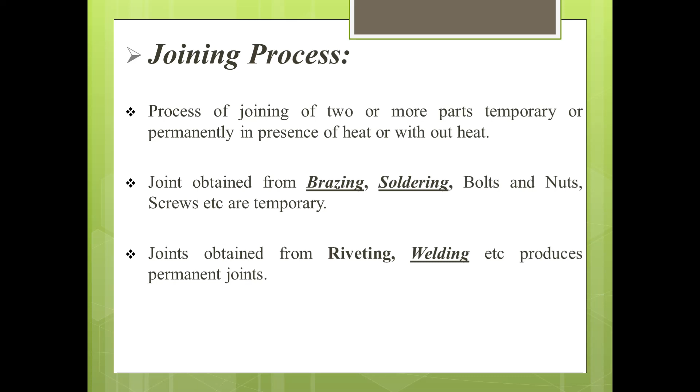And joints done through rivets and welding, we call permanent joints. Welding is also a joining process. And riveting - you might have seen rivets, which have a head - riveting and welding are permanent joints.

Next we are going to discuss welding. Welding is the process of joining two similar or dissimilar metal pieces by heating them to a suitable temperature and then fusing them together, either with or without the application of pressure. That is welding.

Welding is a joining process where we join two similar metals or two dissimilar metals by the application of heat, increasing the temperature to a certain level, and then fusing them together by the application of pressure, or without pressure. That is the process of welding.

A slight gap exists between the workpieces which can be filled by a filler metal, but welding can be carried out without the use of filler metal. Whenever you want to join two metals or dissimilar metals, there will be a slight gap between the workpieces, which can be filled by filler metal - extra metal used in the welding process. But welding can also be carried out without filler metal. Sometimes we use filler material to fill the gap, and sometimes we don't. That is the welding process.

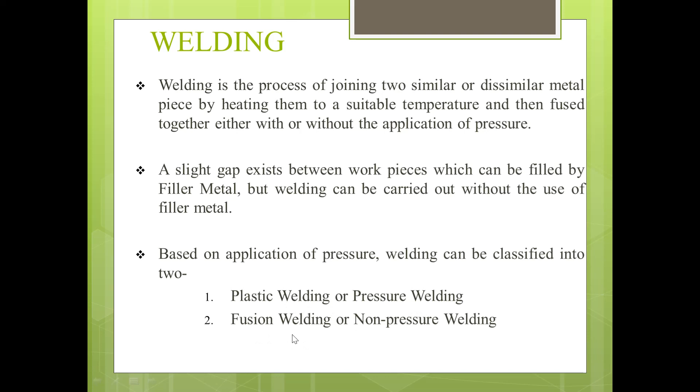Based on the application of pressure, welding can be classified into two types. The first is plastic welding or pressure welding, and the second is fusion welding or non-pressure welding. So we need a clear classification of the types of welding.

There are two types of welding: fusion welding and pressure welding. In fusion welding, we have homogeneous welding and heterogeneous welding processes. In homogeneous welding, we include gas welding and electric arc welding. In heterogeneous welding, we include brazing and soldering.

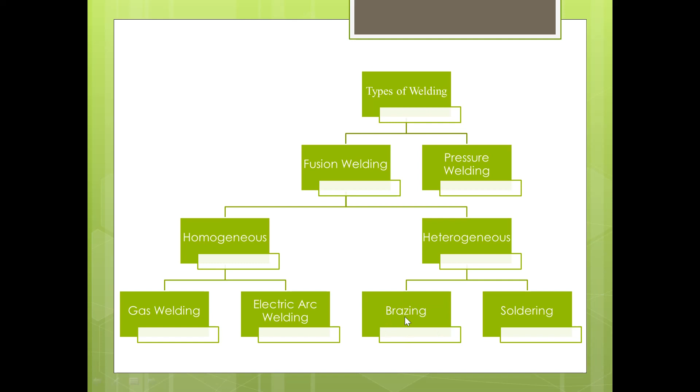We are going to call it heterogeneous welding. Next comes the plastic welding or pressure welding. The metal parts to be joined are heated to the plastic state or above and then fused together by applying external pressure. That is nothing but plastic welding.

Plastic welding means the metal parts to be joined are heated to the plastic state till it reaches the plastic temperature of welding. We heat it and then fuse it together by applying external pressure. Here no filler material is used in plastic welding.

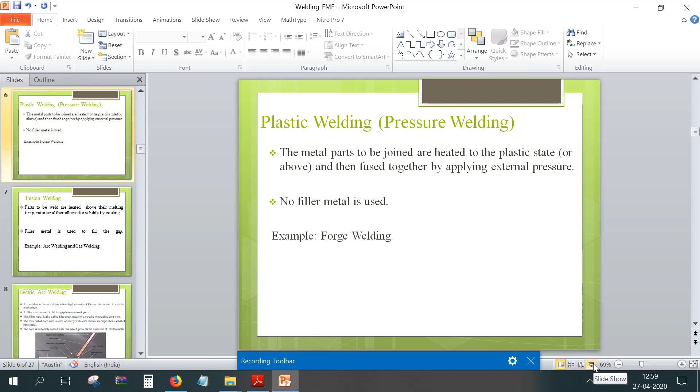An example is forge welding. Forge welding is an example for plastic welding. We are going to call forge welding the plastic welding example.

Next comes fusion welding. Fusion welding is another type of welding process in which parts to be welded are heated above their melting temperature and then allowed to solidify by cooling. Here the parts to be joined are heated above their melting temperature. All metals have certain melting temperatures, so we heat above the melting temperature and then allow it to solidify by the cooling technique. That is nothing but fusion welding.

First we heat it to an elevated temperature up to its melting point, and then we hold it together till it solidifies by cooling.

A simple example: joining two pieces of paper. First you apply gum to the two ends of the paper, and then press it together. We hold it till the gum solidifies. That is a simple way to understand fusion welding.

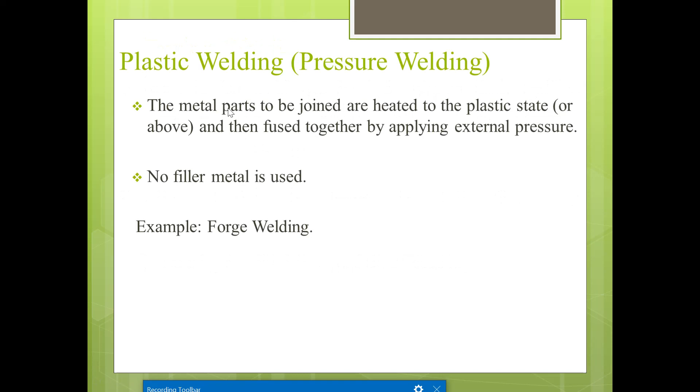Here also we take the parts, heat them above their melting temperature, and allow them to solidify by cooling. Filler metal is used to fill the gap. In fusion welding we use filler metal, and examples are arc welding and gas welding. But keep in mind, plastic welding does not use any filler metal, while fusion welding does use filler metal to fill the gap.

Arc welding is a fusion welding process where a high intensity electric arc is used to melt the workpiece. We induce a high intensity electric arc from the electrical supply, and the surface of the workpiece is melted by the electric arc.

A filler metal is used to fill the gap between the workpieces. This filler metal is also called the electrode. We call this electrode itself the filler material in electric arc welding, and it is made of a metallic wire called the core wire.

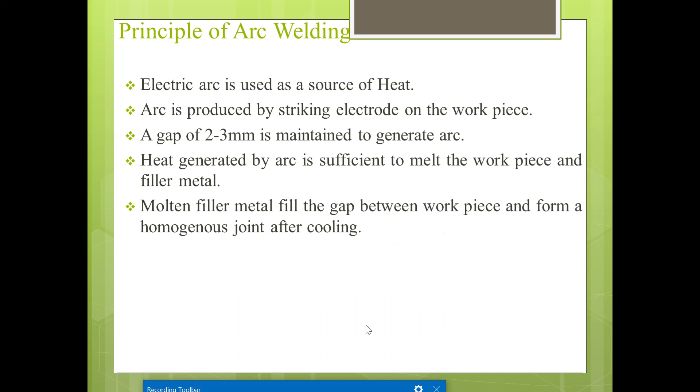The temperature of the arc ranges from 5000 to 6000 degrees Celsius. The electrical energy produced in this arc pool or welding atmosphere has this temperature, and this high heat melts the base metal and the tip of the filler metal.

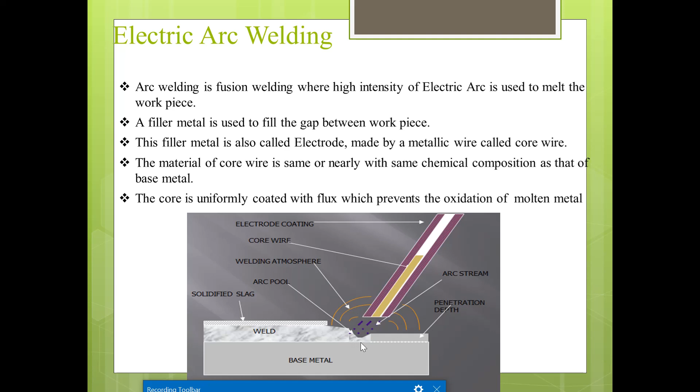The molten filler metal is transformed and transferred to the molten base metal, forming globules. Whenever a temperature of 5000 to 6000 degrees Celsius is induced, the electrode melts, and the surface of the weld base metal also melts.

Molten filler metal is transferred to the molten base metal in the form of globules, and the deposited metal fills the joint, forming a single piece of metal. Whatever metal is deposited forms a joint, resulting in a single piece of metal.

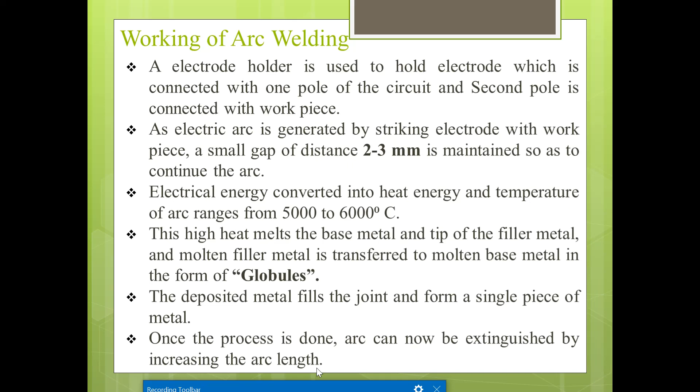Once the process is done, the arc can be extinguished by increasing the arc length. Once the process is finished, we extinguish the arc by increasing its length. This is the working of arc welding, as shown in the same figure discussed here.

Welding uses AC or DC current; we can use alternating current. AC means nothing but alternating current, and we can also use direct current. So the circuit consists of a step-down transformer.

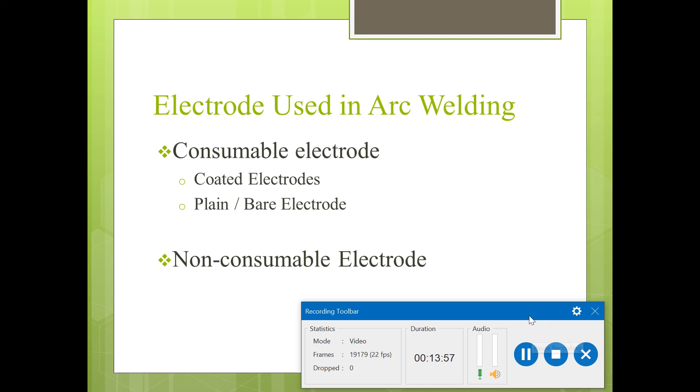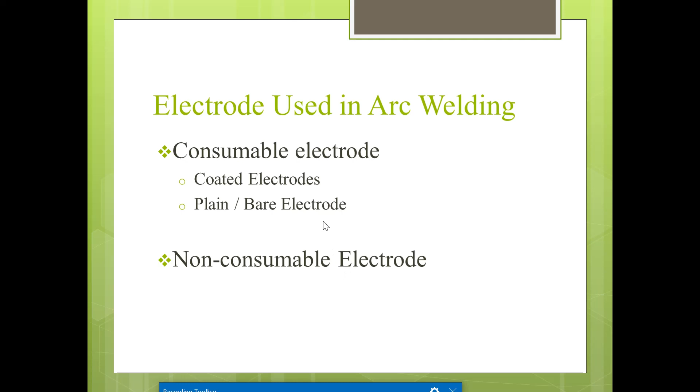Electrodes used in arc welding - we use different types of electrodes in arc welding. These are classified as consumable electrodes and non-consumable electrodes. Consumable electrodes are coated electrodes or plain, bare electrodes. Non-consumable electrodes are ones we do not consume during the process.

Welding fluxes - different types include SiO2 (silicon oxide), titanium oxide, magnesium oxide, and aluminum oxide, used as typical welding fluxes. These produce a gaseous shield to prevent oxidation of the molten metal, and chemically react with the oxides to form a slag.

The flux reacts chemically with the oxides and forms a slag. The slag floats and covers the top portion of the molten metal and stabilizes the arc, as seen in electric arc welding.

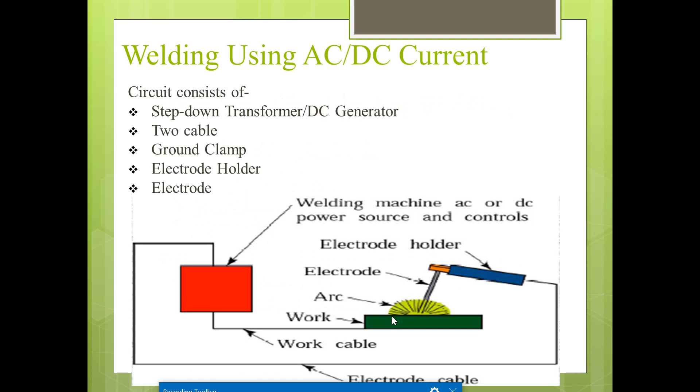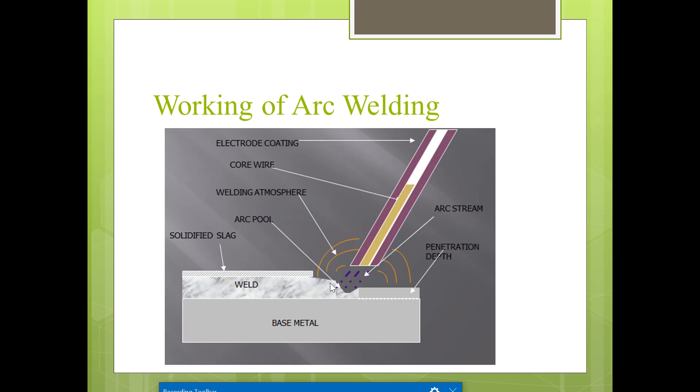I'll show you the slag layer - this is called the solidified slag layer which covers the molten metal. It prevents this molten metal from the oxidation process. That's what the weld fluxes do: the slag floats and covers the top portion of the molten metal and stabilizes the arc.

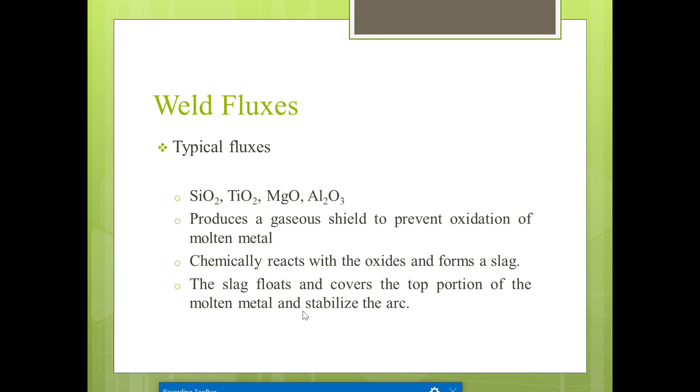Next is gas welding. Gas welding is a fusion type of welding process, classified under fusion welding. The heat for melting the base metal is produced by the combustion of gases. We use different gases to produce fire or heat, then use that heat to melt the base metal, and after melting we weld it. This is the gas welding process.

Gases are mixed in proper proportion to generate the required heat for melting. Combustion of gases takes place inside a pipe called the welding torch - similar to how electric arc welding uses an electrode holder, gas welding uses a welding torch. Within the torch, a proper amount of gas comes in and is mixed, and the burning takes place within the pipe.

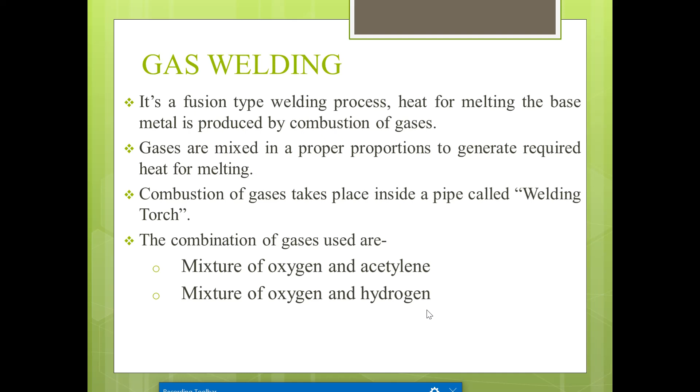The combination of gases used for gas welding is a mixture of oxygen and acetylene - called oxyacetylene welding - or a mixture of oxygen and hydrogen can also be used. The first is the oxyacetylene process. The arrangement for oxyacetylene welding consists of two large cylinders: one for oxygen and one for acetylene, with a pressure regulator to regulate the pressure of both oxygen and acetylene.

A welding torch is an element where we mix the perfect proportion of oxygen and acetylene. The operation is very simple. We take one oxygen cylinder and one acetylene cylinder, both connected with their respective regulators to send equal amounts of oxygen and acetylene to the welding torch. There, oxygen and acetylene mix equally, and combustion of the gases produces the flame. The temperature of the flame ranges up to 3200 degrees Celsius, which is sufficient to melt the workpiece.

The oxygen gas comes through this pipe and the acetylene gas comes through this pipe, both connected to the welding torch. Here we mix the oxygen and acetylene and produce a flame, having a temperature of 3200 degrees Celsius, sufficient to melt the base metal. This is the base metal - one metal and another metal - which we are going to join using this temperature produced by the welding torch.

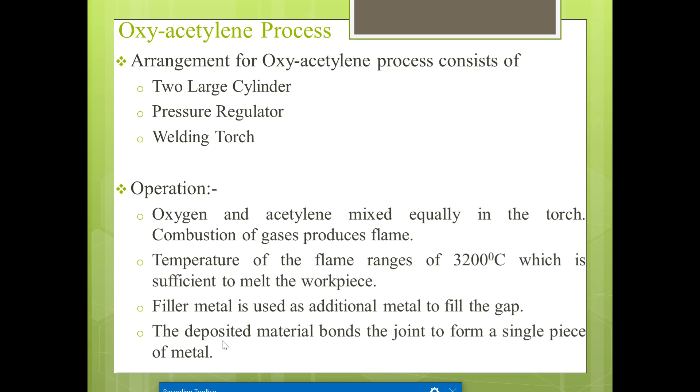Filler material is used as additional metal to fill the gap. Here we use the filler rod - an extra filler rod. The heat coming from the welding torch melts the base metal, and this filler rod fills the gap, creating the perfect joint. So this is a simple explanation of the oxyacetylene process.

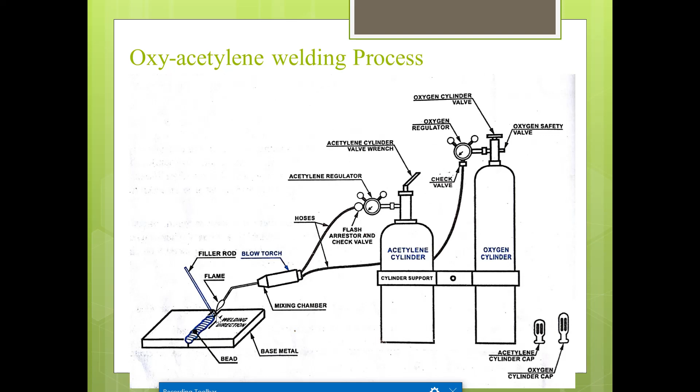One cylinder holds acetylene, another holds oxygen. Equal proportions of oxygen and acetylene are brought to the blowtorch or welding torch, where they mix and produce a flame with a temperature of 3200 degrees Celsius, melting the base metal. The base metal is then joined using a filler rod, which fills the gap between the two base metals. This is the oxyacetylene welding process.

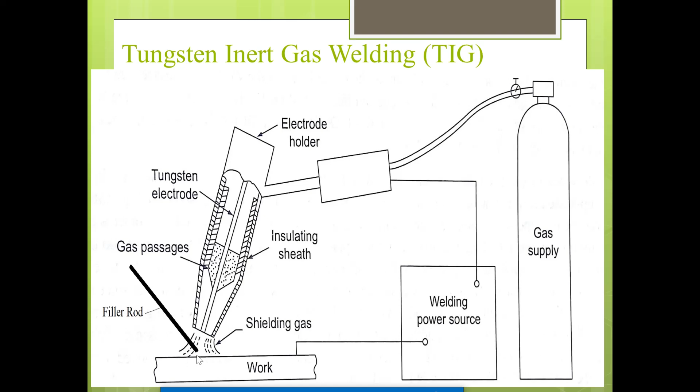In the tungsten electrode, the gas is going to burn the tungsten electrode. It is going to create a high temperature here, and that gas flame we are going to pass to the base metal. The base metal will be melted, and again the filler rod is going to fill the gap.

This is nothing but tungsten inert gas welding. We have another type of gas welding, that is nothing but metal inert gas welding.

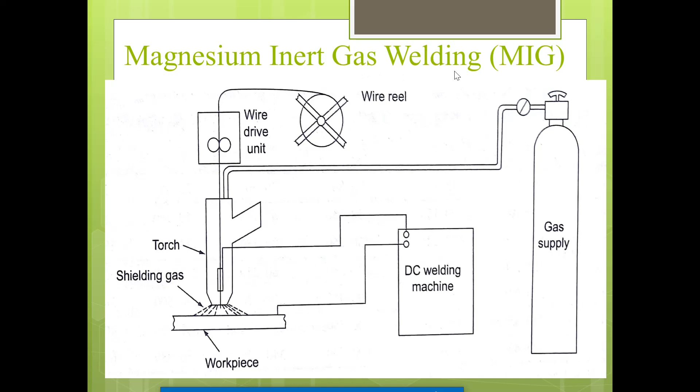So this is nothing but the metal inert gas welding technique.

These are very simple techniques, and a question on metal inert gas welding or tungsten inert gas welding will likely be asked in the exam.

The next one is types of flames produced in gas welding. There are different types of flames produced in a gas welding process. Based on the mixture ratio of oxygen and acetylene, the flame can be divided into three types in oxyacetylene welding.

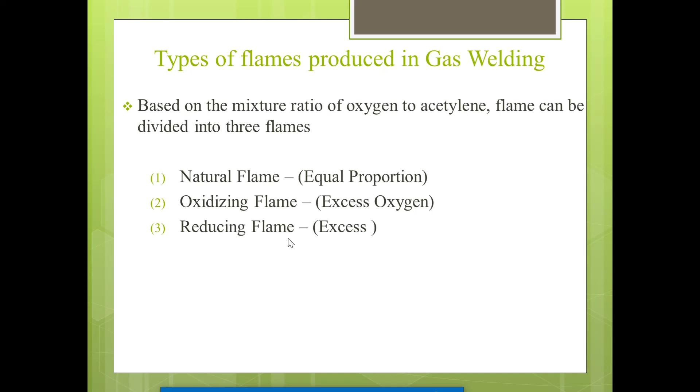First is the natural (neutral) flame, where we have an equal proportion of oxygen and acetylene. The oxidizing flame has an excess amount of oxygen. In the reducing flame, excess acetylene is present. So we can differentiate three types of flames here: neutral flame, oxidizing flame, and reducing flame.

So these are the three different types of flames we observe in the oxyacetylene welding process.

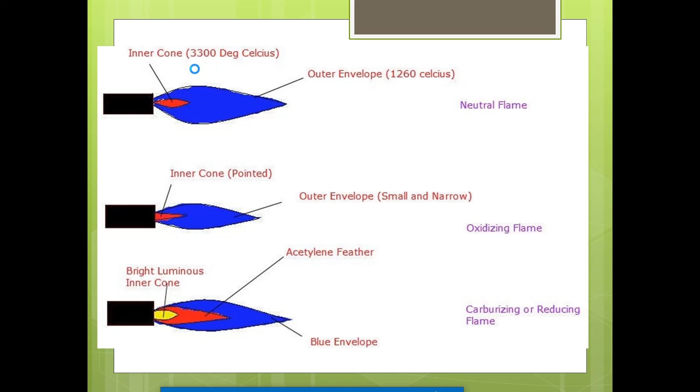You can look at the temperature here: 3300 degrees Celsius for the inner cone, and 1260 degrees Celsius for the blue envelope.

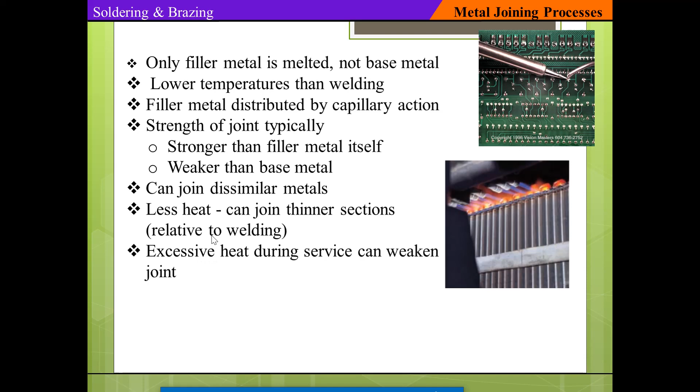Sometimes it may have a tendency to form weak joints in soldering and brazing. Solder, we call it equal to a filler metal, and alloys of tin are used here, such as silver, bismuth and lead.

The melting point of soldering is typically below 450 degrees Celsius. Flux is used here to clean the joint and prevent the oxidation process.

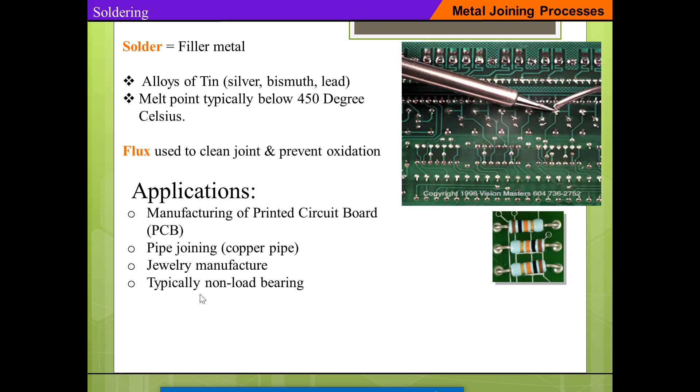The various applications of soldering are manufacturing of printed circuit boards (PCBs), pipe joining such as copper pipes, and jewelry manufacturing, joining ornaments. Typically it is used for non-load bearing applications, where there is no load.

Next is manual PCB soldering. How is PCB soldering done? This is a soldering process using a soldering iron and solder wire, called PTH, pin through hole connectors. Soldering iron and solder wire can be observed here, using a solder gun and solder wire.

Heating the lead and placing the solder: we heat the lead, that is the filler material, with the solder gun, place the solder over the circuit, and heat it for 2 to 3 seconds.

We heat the solder gun for 2 to 3 seconds and place the wire, bringing the lead wire near the electrode gun and melting it. Then we trim off any excess lead present over the circuits. This is the pin through hole connector, the manual PCB soldering process, explained with simple images.

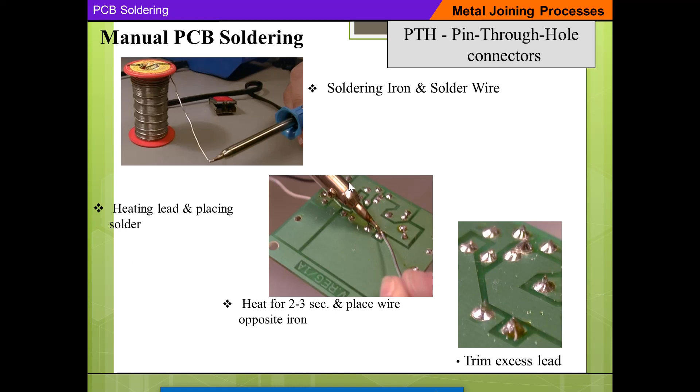Brazing technique is the use of a low melting point filler metal to fill a thin gap between mating surfaces to be joined, utilizing capillary action. We use a filler metal with a very low melting point, which at a small amount of temperature melts to fill the thin gap between the mating surfaces, utilizing capillary action.

Filler metals are called spelter, including aluminum, magnesium and copper alloys, with melting point typically above 450 degrees Celsius. Flux is also used in the process.

Types of brazing are classified by heating method. Applications of this brazing technique include automotive joining of tubes, used in the automotive industry, and pipe or tubing joining.

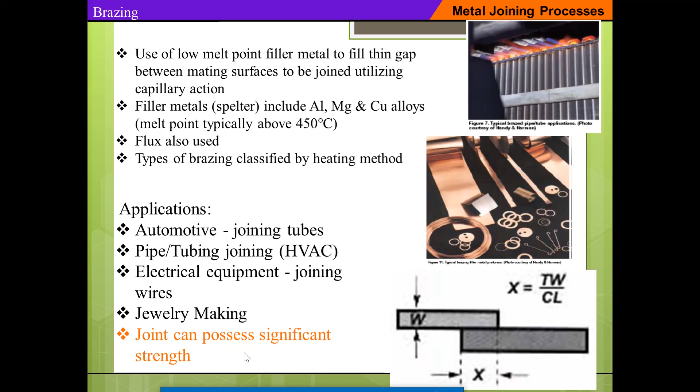Electrical equipment joining wires - brazing is used in electrical equipment for joining of wires. It is also used in jewelry making. The joint can possess significant strength, which is why we use the brazing technique.

Now let's compare welding with soldering and brazing. The first point of comparison is melting temperature.

In welding, it is a high temperature process where the base metals themselves are heated above their melting temperature. In soldering and brazing, it is a low temperature process where the base metal is not melted.

Next is the filler metal. In welding, the filler material used is made up of the same material as the base metal. But in soldering and brazing, the filler materials used are not the same as the base metal.

Formation of the weld joint - how joints are formed in welding. The joint is formed by solidification of the molten metal with the molten base metal. After heating, we solidify and cool them in welding.

But in brazing, the joint is formed by diffusion of molten filler metal. We use the diffusion process of molten filler metal in soldering and brazing.

Strength of joint - in welding, the strength of joint obtained is much stronger than the parent metal. But in soldering and brazing, the strength of joint obtained is very low compared to welding.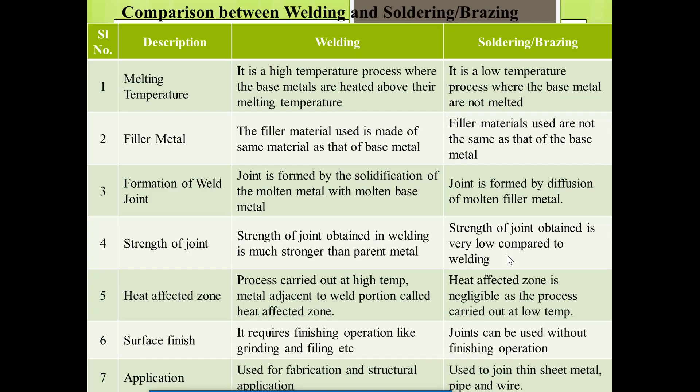Next, a small chapter we will cover in the same module 4 is gear drives. Here we need to understand the different types of gears, study the velocity ratio, solve some small problems in gear drives, and learn about the different functions of gears.

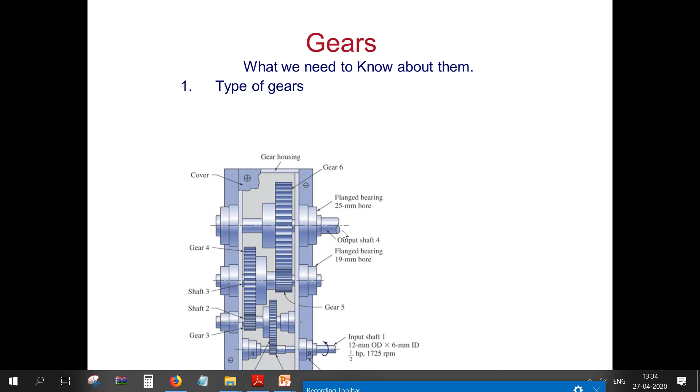Let's start with gear drives. Here we need to know about the types of gears. I have put one figure here so you can see the different gears, which are engaged in different manners. This typical image shows the gearbox control in vehicles, with different types of gears - the teeth above the circular surface, which we call gears.

The types of gears are: spur gear, helical gear, bevel gear, and worm gear - worm gear is also included for the syllabus.

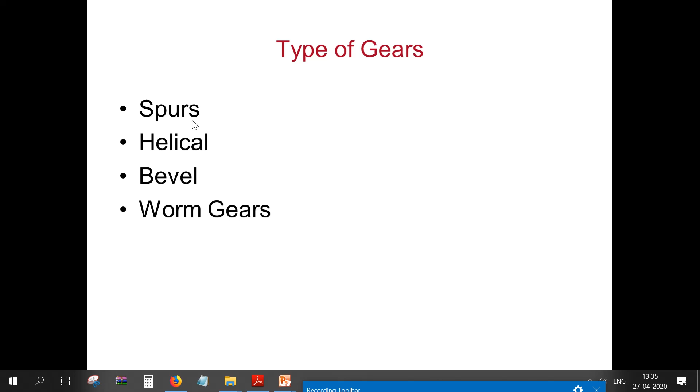The tooth trace is parallel to the axis. This is a highly demanded gear which is easy to manufacture and to assemble. You can easily assemble this, and it is easy to manufacture.

So this is called a spur gear, and this type of torque transmission is done in spur gears. Spur gears are used to transmit power between two parallel shafts. The teeth on these gears are cut straight and are parallel to the shaft to which they are attached, which is the tooth shape parallel to the axis of the gear or the shaft.

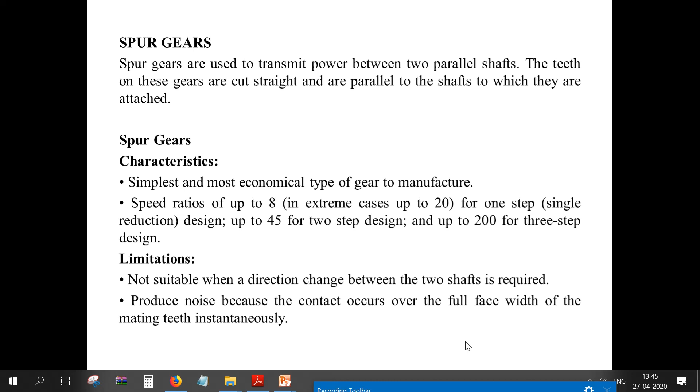It produces a huge amount of noise because the contact occurs over the full face width of the mating teeth instantaneously. Full face width meaning the contact is firmly over the full face width. This creates the noise in spur gears.

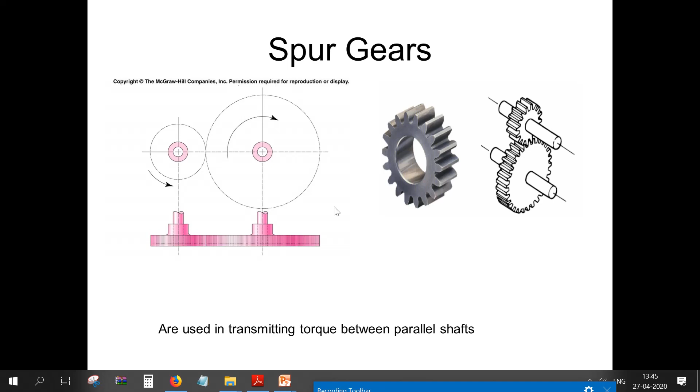Helical gears provide more strength, less oscillation, and lower noise level compared with spur gears. Here the noise is less, there is more strength, and less oscillation is observed in the helical gear.

However, helical gears provide a thrust load in the axis direction. If the rotating direction is changed, then the thrust load is reversed. We can reverse the thrust load also in helical gears.

The characteristics of helical gears are: the longer teeth cause helical gears to have differences from spur gears of the same size. What is the main characteristic difference between spur gear and helical gear? Tooth strength is greater because the teeth are longer than the teeth of a spur gear of equivalent pitch diameter.

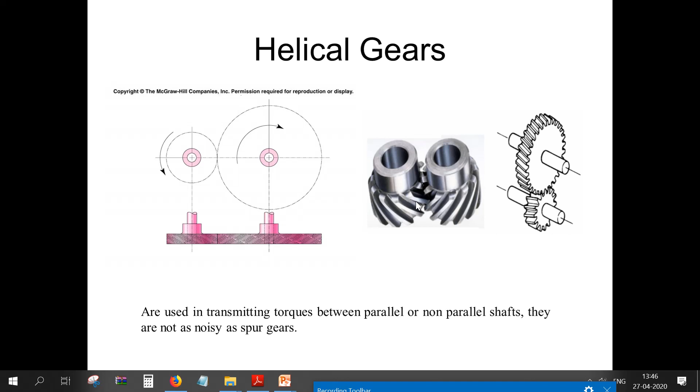Here you can observe the teeth of the helical gear; it is longer compared to the spur gear, which provides a firm grip for the helical gear. It can carry higher loads than spur gears because of greater surface contact of the teeth, and it is going to carry a huge amount of load compared to spur gears.

It can be used to connect parallel shafts as well as non-parallel, non-intersecting shafts. Here we can observe the connection between two parallel and non-parallel shafts, as well as non-intersecting shafts, which can be done with helical gears.

Helical gears are quieter, smoother, support higher speeds, and are durable, since spur gears produce more noise and vibration, which is not the case with helical gears.

The limitations of helical gears are that gears in mesh produce thrust forces in the axial direction. Also, the design is quite difficult for a helical gear, and it is more expensive compared to spur gears.

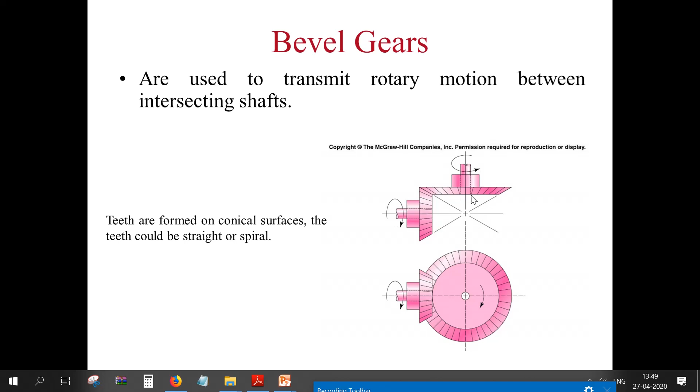Characteristics of bevel gears: they are designed for efficient transmission of power and motion between intersecting shafts, as we've already seen, so that power can be easily transferred.

A good example of a bevel gear is seen as the main mechanism in a hand drilling machine. The handle of the drill is turned in a vertical direction, and the bevel gear changes the rotation of the chuck to a horizontal rotation. You can view an animation of a hand drilling machine to easily observe the bevel gear in action.

Bevel gears permit minor adjustment during assembly and allow for some displacement due to deflection under operating loads, without concentrating the load on the end of the tooth. This way the load can be equally distributed over the entire tooth.

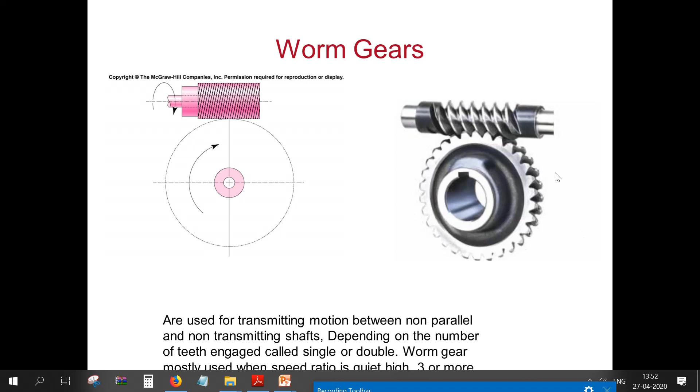Worm gears have an interesting feature that no other gear has: the worm can easily turn the gear, but the gear cannot turn the worm. That is a very special characteristic of the worm gear.

This is because the angle on the worm is so shallow that when the gear tries to spin it, the friction between the gear and the worm holds the worm in place. This feature is useful for machines such as conveyor systems, in which the locking feature can act as a brake for the conveyor whenever the motor is not turning.

This is very important in excavators. You can see that whenever it is moving, when the current stops, it is going to stop at one particular point. It won't come back to its original position. At that particular time, we can use the worm gears as an arrangement.

Worm gear is always used as the input gear, that is, the torque is applied to the input end of the worm shaft by a driven sprocket or electrical motor.

The next characteristic is that worm gears are best suited for applications where great ratio reduction is required between the driving and the driven shaft. Whenever we need a higher reduction of power, we use worm gears.

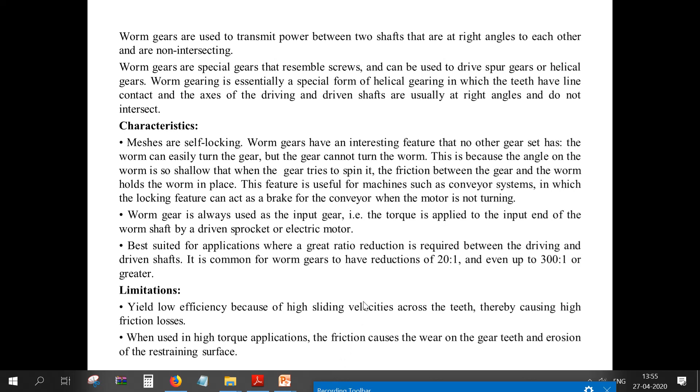When used in high torque applications, the friction causes wear on the gear teeth, and erosion of the restraining surface can also occur in the worm gear, and this erosion is higher.

Next, we shall discuss the difference between belt drives and gear drives. However, before discussing this, we would need to study belt drives, but belt drives are not dealt with in this particular chapter, so I am not going to cover belt drives versus gear drives here.

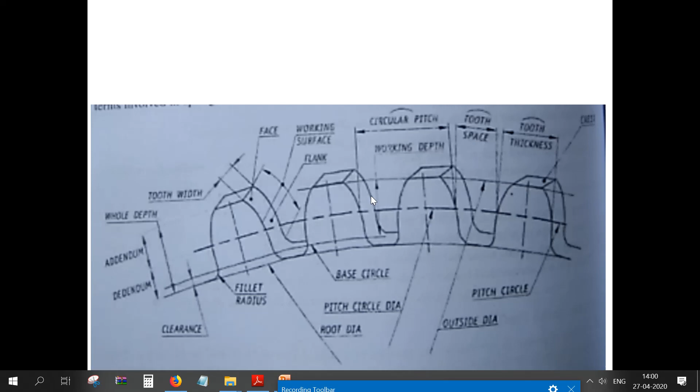We also need to explain the addendum and dedendum circles, the gear terminology for a gear, and discuss the velocity ratio of gear drives and gear trains. But if I put this into the PPT and explain directly in the presentation, it may not be clear. So I will make a separate video, writing and solving the velocity ratio, gear drives and gear trains on paper, and upload that video in the coming classes.

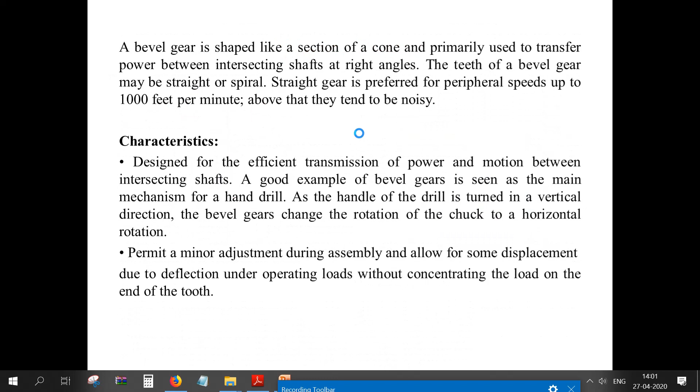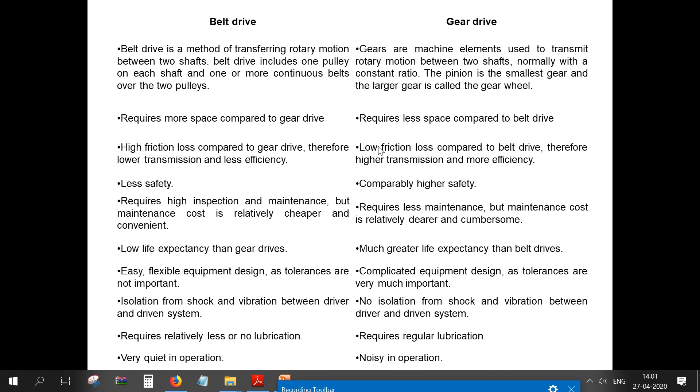So up to this point, you have studied about the different types of gears: spur gears, helical gears, bevel gears, and worm gears. These 4 different gears are very important, and the differences as well as the velocity ratio I am going to upload in the next video.